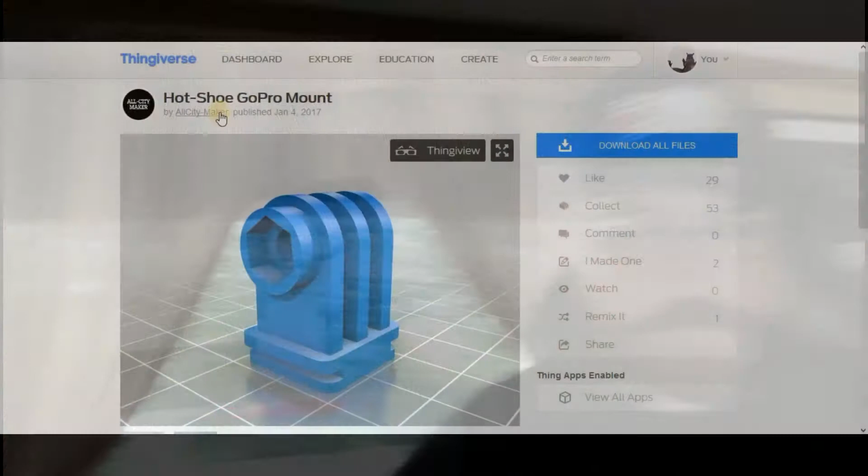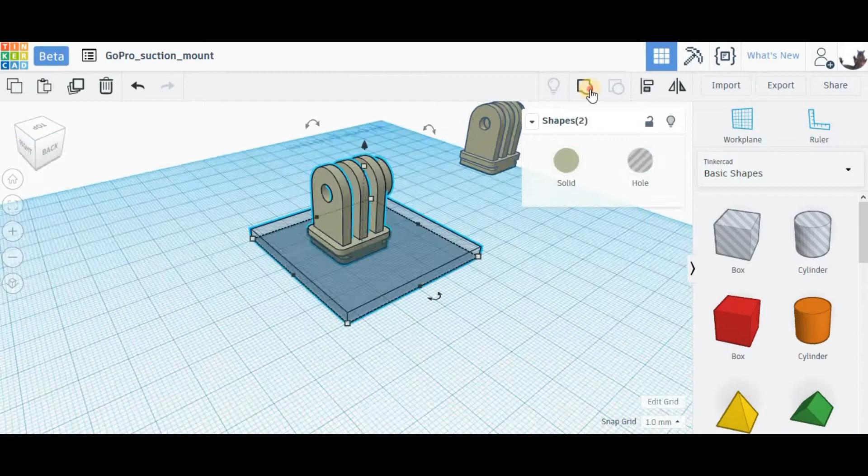Alright, so in typical Midwestern fashion, I'm going to take this design by All City Maker here at Thingiverse, and I'm going to remix it and call it my own. It's a hot shoe mount for a GoPro adapter for a DSLR camera, but we're just going to use it because they have the tolerances set correctly for the GoPro mount. So basically just cutting the end off, putting a block in, making it stand out a little bit more, a little bit higher, then group those two together at a later date.

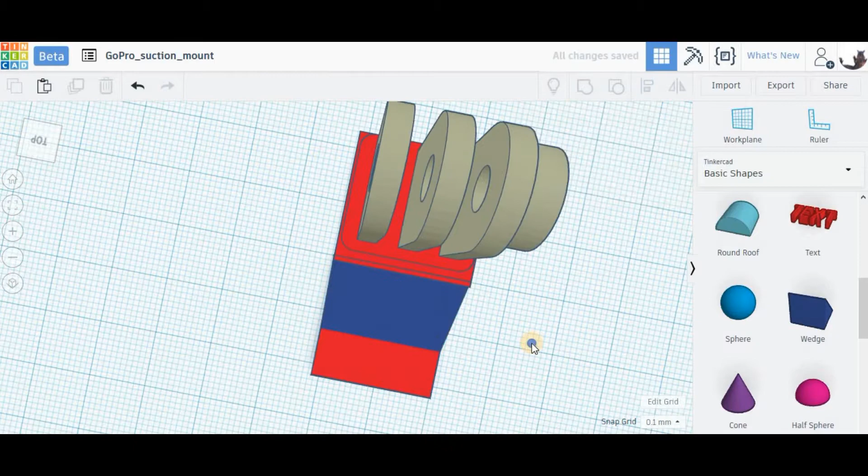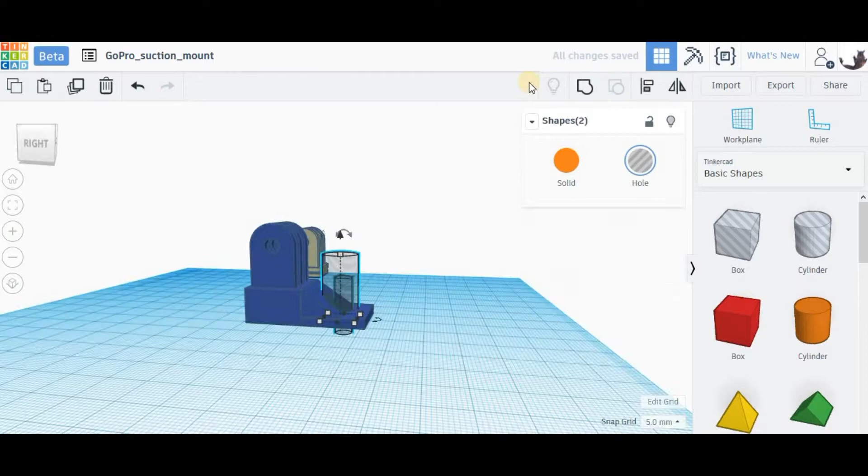So grouping in Tinkercad will let you kind of get away with some stuff, but it's making it a little larger there, putting a little support on the bottom for a screw to mount a fastener to it, making a little bit more support with that wedge in there. And then we're gonna have to duplicate that, cut off the excess so it's a nice smooth pattern. Then we gotta put in an adjustment for a screw, and then put an additional larger, what do you call it there, yeah, that thing, recess.

So then after that we're gonna throw it in Simplify 3D, and right away we're gonna notice we got a bit of a problem. You can see about 3 lines here. Those indicate that those layers aren't fused together. So Tinkercad does this sometimes, even though the model might look really nice in Tinkercad itself. Sometimes there's an issue that doesn't really get resolved until you put it into a slicer.

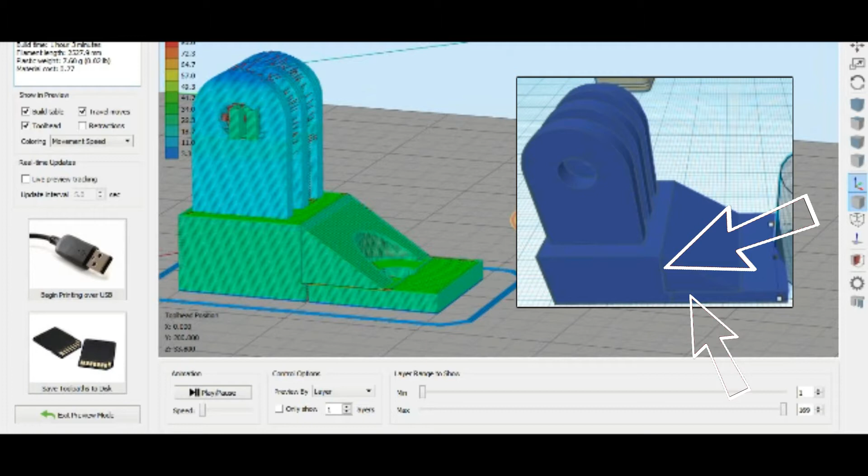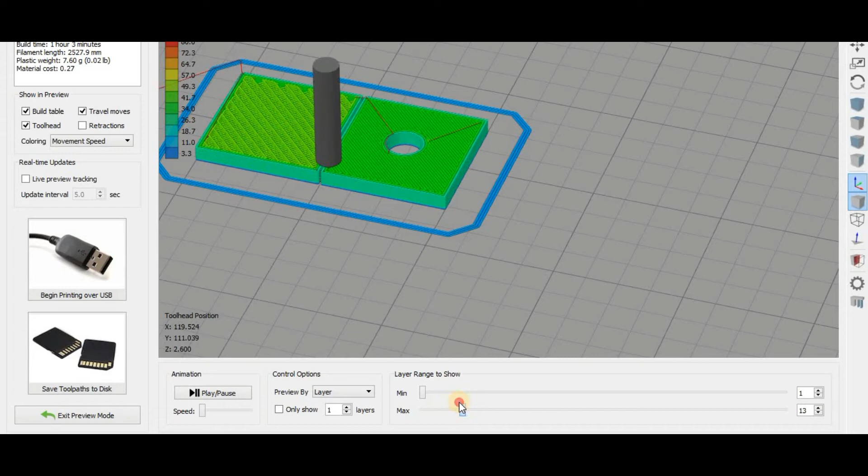So the STL, although it looks like it's one solid object, there wasn't enough overlap between those two pieces to actually make it overlap. So when you end up printing, you get these two kind of separate bases, and they won't print as one solid layer. So that becomes a problem with adhesion. Those two blocks then won't be one solid layer. So we're gonna have to go back in to Tinkercad and fix that.

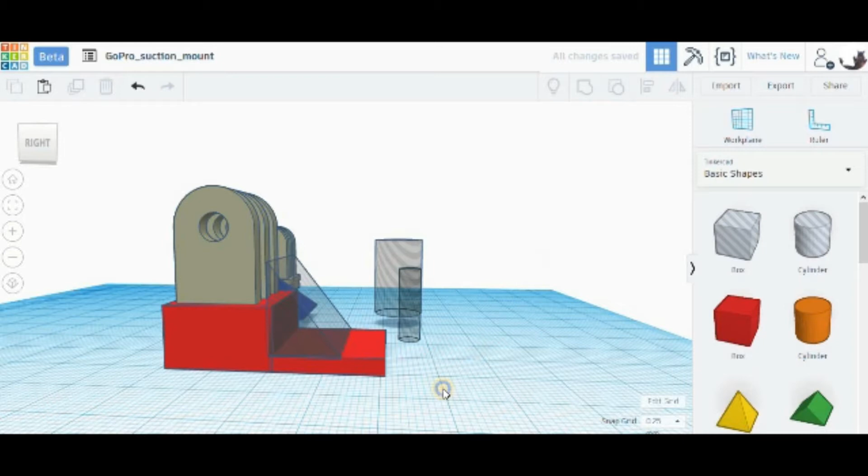So with Tinkercad, you can see here, I'll be moving it over and overlapping it. So theoretically, any little bit of overlap in between those two parts should be fine. And when you group it, it should be one large STL instead of multiple pieces like we just saw in Simplify 3D. But for some reason, if you don't overlap it enough, it'll still indicate that it's 3 different pieces instead of one large object.

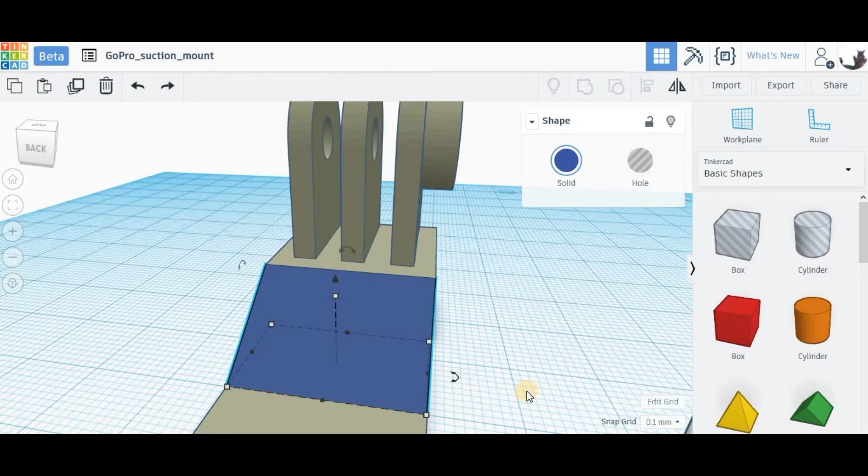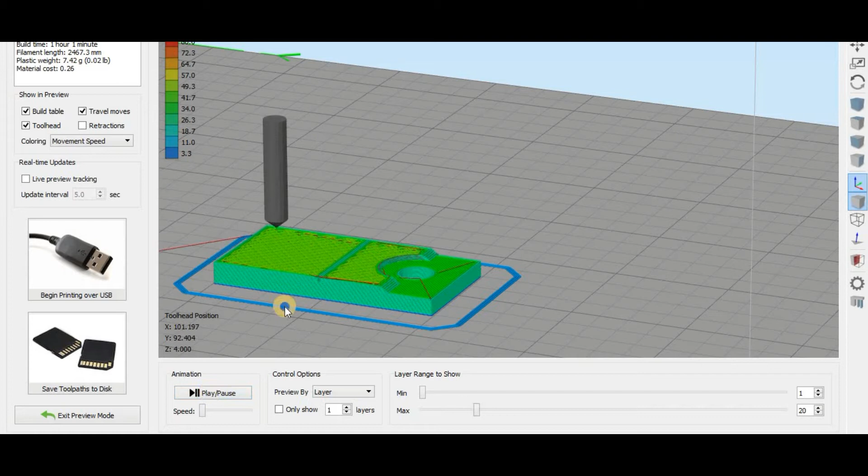So I'm just in here messing around a little bit, trying to get it to work, trying to get everything grouped, and then putting in for the fastener, group it again, throw it back into Simplify 3D, see if we got any problems. And right away you can notice that same little bit of a problem from the wedge to the main body of the piece. Still not going to have enough adhesion there, so we're gonna have to go back in and fix that again.

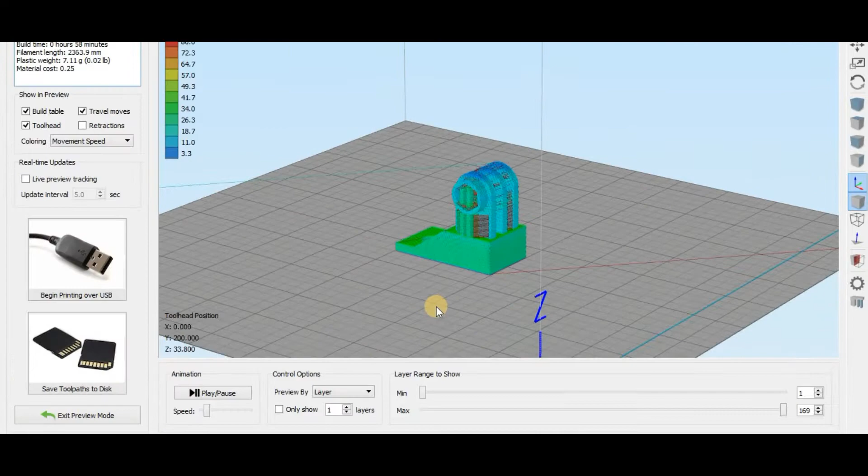So once again, back into Tinkercad, trying to get it to work. So I know that the major problem is right there, so I moved the wedge back just a little bit, and now when you actually slice it, you can see it's all one large component, and that's about all we have to do. I tried to think about doing some support on here. I had the spool of PETG in the printer, and it's really kind of syrupy, and so I was messing around with settings, and by the end of it I just said, I'll just use a PLA in which I don't need supports. So time lapse.

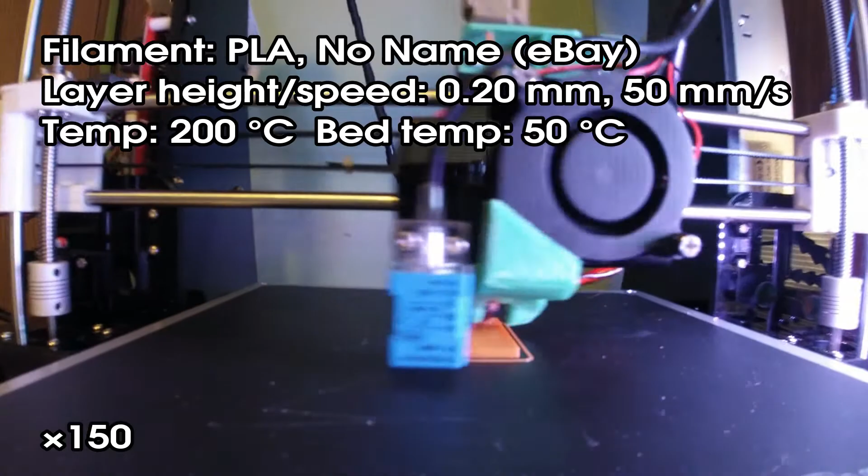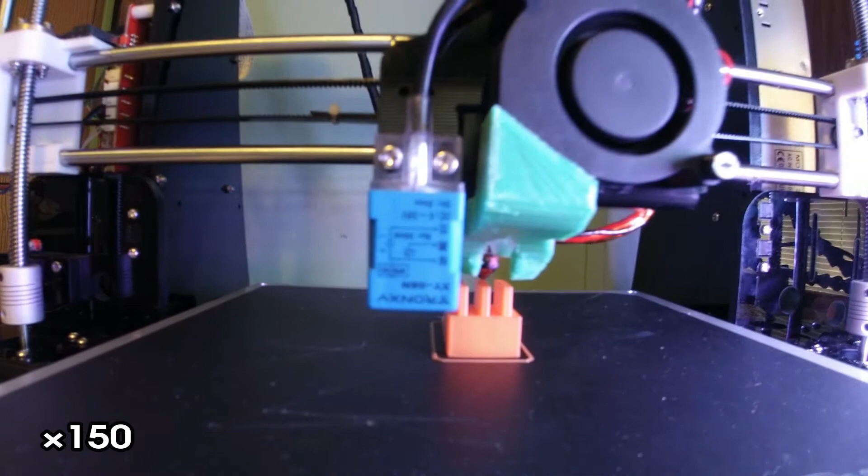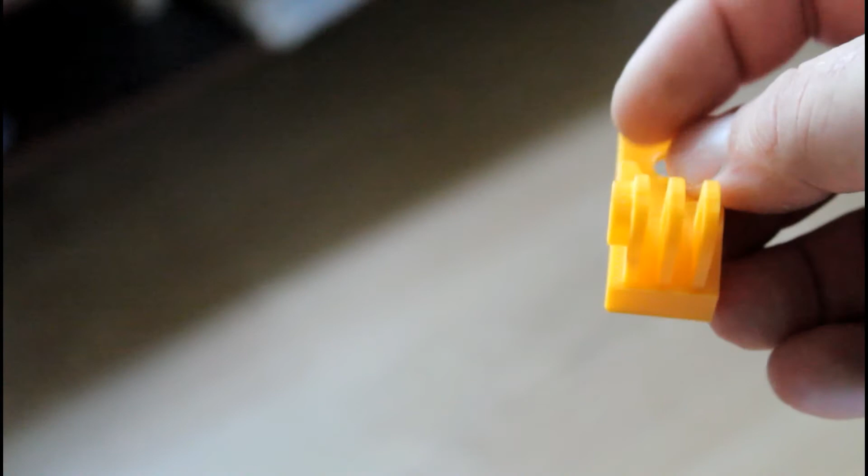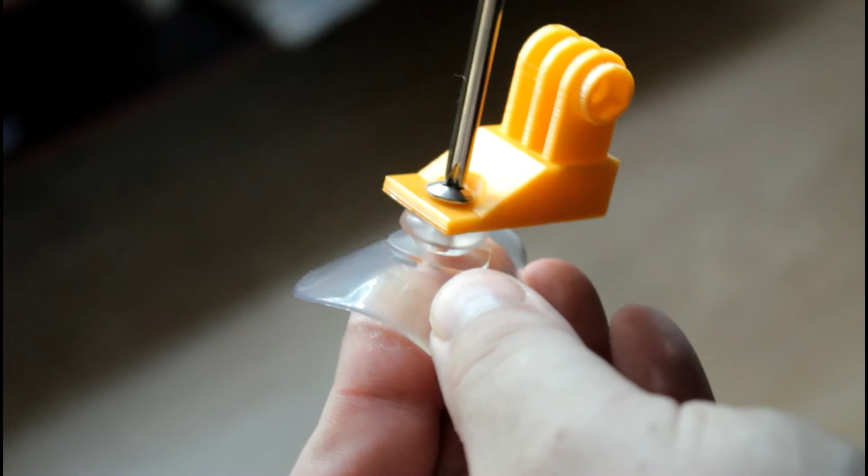I'm actually really impressed with how these prints turned out. This is just no-name cheap PLA from eBay, and it prints like a million dollars. The suction cups are just off of some bird feeders from the store. They were $3. Ended up getting 2 suction cups, so it's a win-win situation. The mount turned out to work pretty well, holds the GoPro vertical, and it gives you this footage you're about to see.